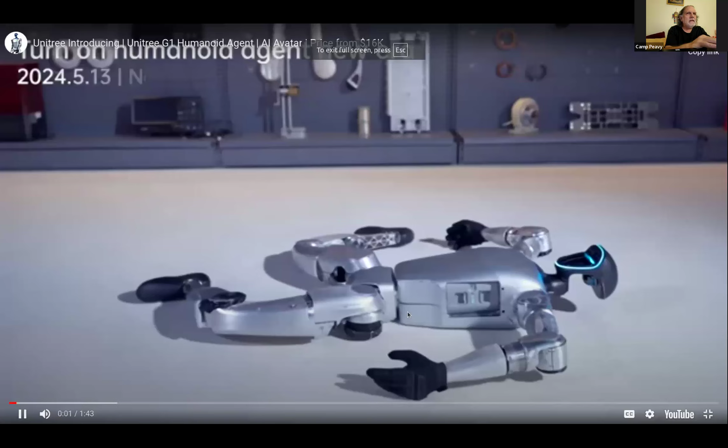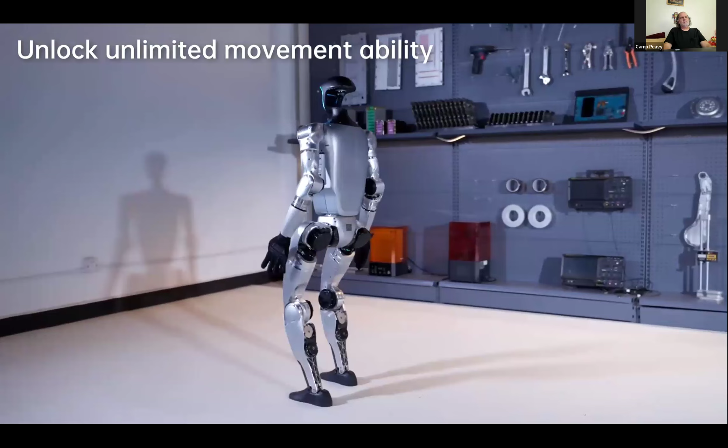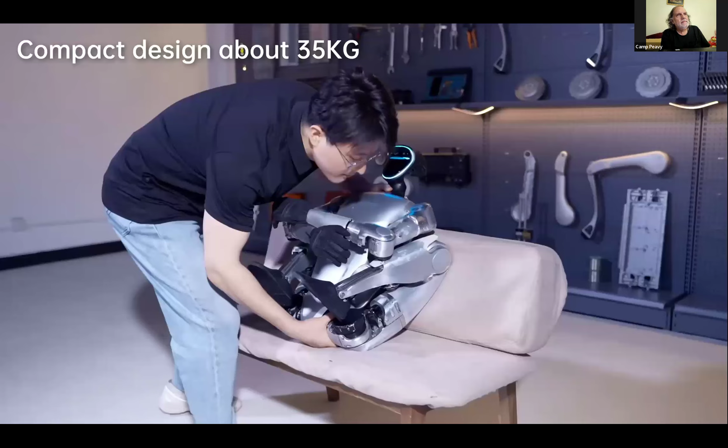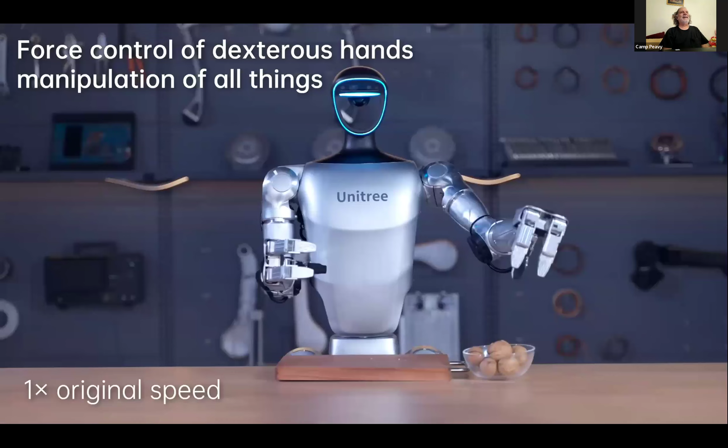Did any of you guys ever actually try to buy it? So the reason I ask is we actually tried to buy it, and it was kind of weird - we were asked, like, to verify who he was, almost like asking for his social insurance number just to even purchase it. And he was saying he couldn't use credit cards. It was really strange. I don't know if anyone else tried to actually buy it. I think Tony wanted to rent it. I think he was saying too, it wasn't like aluminum - it looks like aluminum, but it was kind of like plastic 3D printed parts. I'm not sure if that's true, but 16K for a humanoid robot, even if it was 10 times the price, like 160K, that's still an insane deal. Yeah, but you got to be able to get it, and it is pretty cool. They say it comes without hands for that price. No hands, and I don't think it includes software.

Anyways, there's a link in the chat there. Is there any more industry news anybody wants to bring up, talk about?

You want to see the Omni ChatGPT? I got a video I pulled up. Okay. Are you seeing my screen? Yes, here it goes.

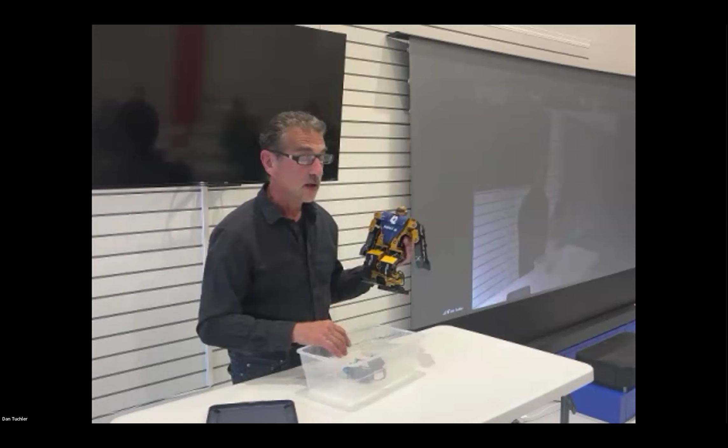That's not what we're demoing here, really. Originally this came with an IR controller, but in 2006 Dave Calkins asked me to do something a little less primitive, because the same IR controller controlled all the robots and we wanted to play soccer. So we took a PlayStation controller, cut the cord off, built a little PIC board with a Zigbee adapter on it. We put a Zigbee adapter in the head, and we ran it for years.

And then it got kind of cumbersome to run joysticks and buttons, so I created a Windows app, which was the easiest at the time with Microsoft Visual Studio. I was able to do push buttons and everything using the same Zigbee.

Ultimately, getting devices with Zigbee was a problem. We had to have USB connectors on them and everything. So for Robo Games this year, I threw away the Zigbee and bought these little things from China. They're little Bluetooth adapters to serial, very easy to interface, and I plugged them in.

I had to build a little voltage drop from 5 volts to 3.3, because it didn't come with a regulator, but you can buy them with a regulator. And I plugged it in, and then I wrote an app. It runs on Android, Windows, Linux, it runs on everything.

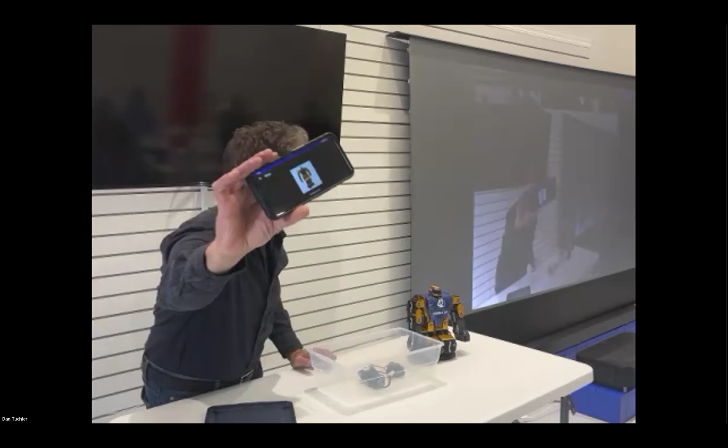I wrote it in Visual Studio .NET. So let's see, yeah, I don't know. Can you see that? Yes. Okay, so that's the app.

It might already be on, let's turn it on. Let's change the battery. Oh, there we go. Okay.

And then I may have to connect it, I may not. Bluetooth, and say connect, we'll find each one. I renamed each for the robot. This one's RoboNova 42, as indicated with the numbers. I couldn't figure a way of filtering out just by name, so I just choose it out of the list.

So we can go out, and then let's see, Kung Fu, and this shows you all the Kung Fu moves that are on there. Let's see if we can just do a left turn. And so that controls that.

Then ultimately, I had him doing the stair climb for the competition at Robo Games. I won the gold because this was the only guy that could walk up and down the steps. And I programmed it in about 3 hours, which was really amazing that I got it done.

But the important thing is the .NET app. If you want to do something really easy, the code, I'll send you the code. You can just use it as a template if you want to run something on your phone using Bluetooth and push buttons to control it. And that's my demo.

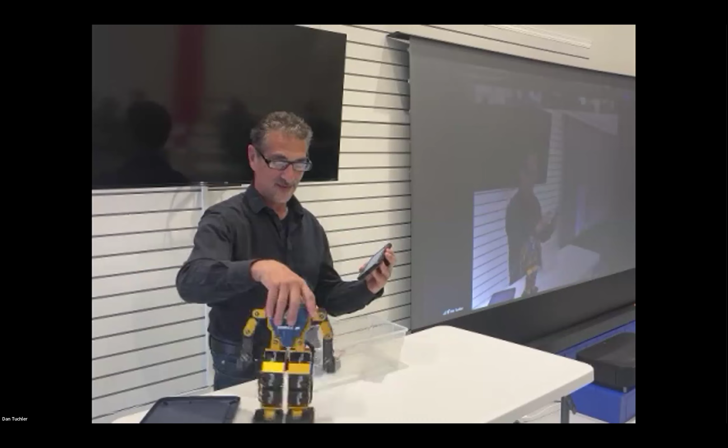So that's the kind of stuff. This is nothing new, yes, right.

Okay, thank you, it's awesome, Dan. Big round of applause. Are you not entertained?

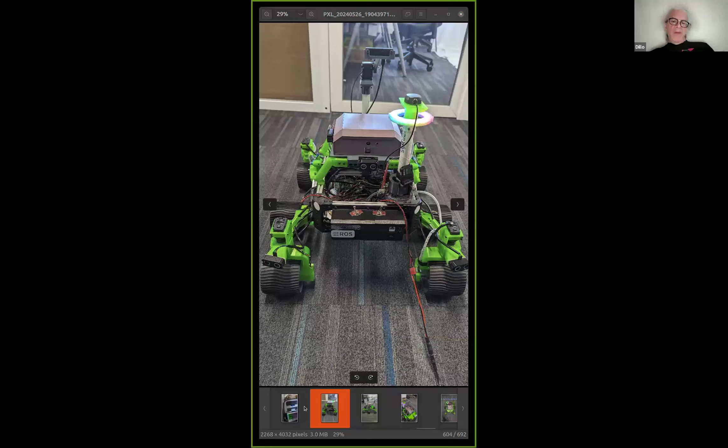Somebody from the club turned me on to these battery modules from a company called Parts Express. They're mostly an audiophile site, but they have these battery packs meant to power a portable speaker. It's 18650 batteries with a bunch of outputs and a barrel jack for charging, and you can plug in a solar panel. If anybody worked with the Turtlebot 2, it's got those same specific connectors on the back for charging your laptop and things.

So I've been building this in OpenSCAD, and I just finally got to the point where I was able to print out the full-size case.

What I wanted to show was this is what the robot looks like right now, with the RC car battery Velcro strapped to it. There's kind of wires hanging out, and I have to hook them and unhook them, and it's kind of a pain in the butt.

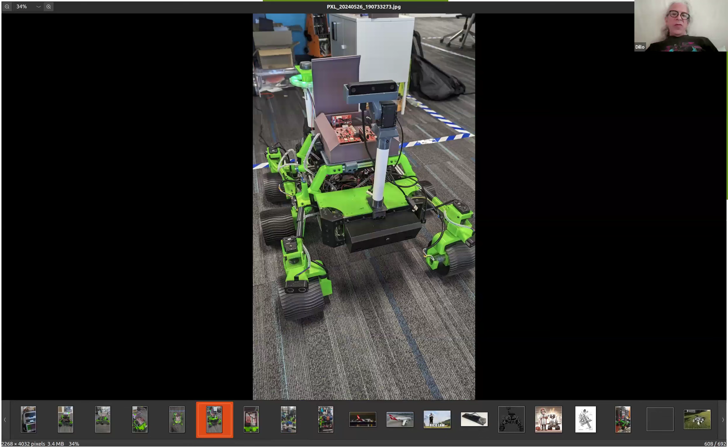So that's kind of what it looks like now. This right here is what it's going to look like in the not too distant future—all the cabling and wiring is gone.

I've got room for 2 battery modules in here. There's this thing in the back which provides a barrel jack to charge off of, and also 2 5-volt USB charging plugs. So you could plug in, like, a voltage boost for the OAK-D into that. That's kind of what it looks like overhead.

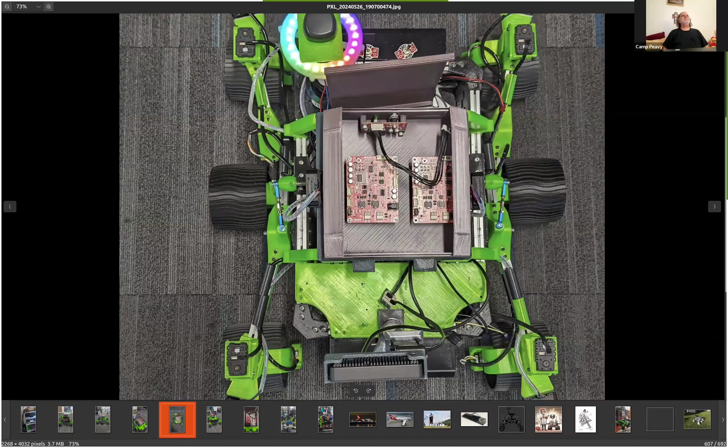And what are those 2 boards on top, Stephen? Those are the battery charging boards that I'm talking about. Okay, so this replaces the RC car batteries and all of the cabling, the Dean's plugs, the Dean's to Tamiya adapter, and just all of that mess with this barrel jack right here. And there are 3 18650 batteries in each one of these.

So I think it just cleans up the top part of the rover and even the insides a bit. You've got those 2 battery packs in there and you're plugging in a jack to charge those. Now all I have to do is plug in a wall wart to charge it. The wall wart is 12 volts. So this thing's doing the balancing and checking, yada yada.

It sounds a little alarm or buzzer when it's done. It does it all by itself, you don't have to hook in the balance cable. The balancer is all plugged in, you're just supplying the voltage.

It's a lot cleaner than this. Are those 2 packs the same? No, one is 12 volts and one is 7 - one is 11.1, that's different than the other one, and one's 7.4. What I get with this thing back here is it down converts to 5 volts. So I get 12 volts, and then 5, and the motors will actually work at 12. They work better at 6, but they will work at 12.

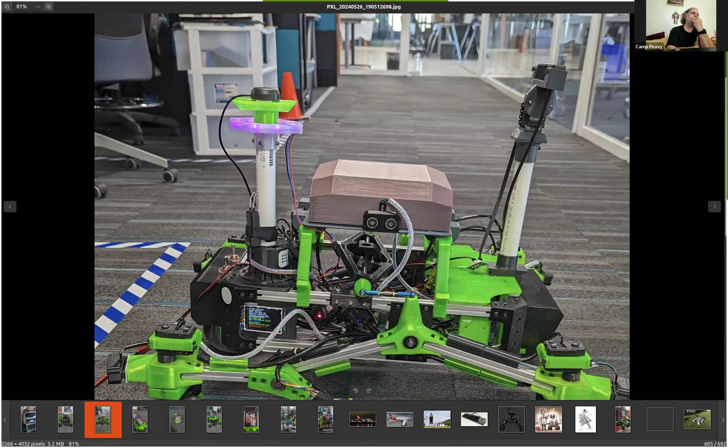So you charge those separately still, right? Well, you plug in the barrel jack connector into the back. Can you charge your RC car batteries with those too? No, the point is to get rid of the RC car batteries. Gotcha, okay I get you now - you're weeding out the RC car batteries. Yeah, and it just makes it a lot cleaner, and it looks... I don't know, I think this looks nicer.

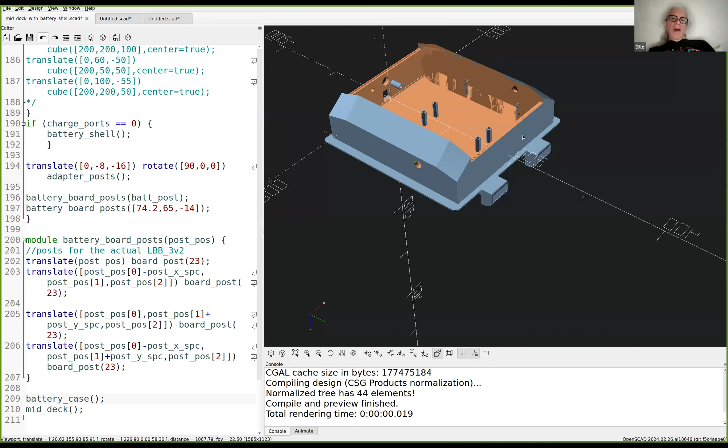So this is what the 3D print looks like. You've got that deck there that you saw, and then you've got the case.

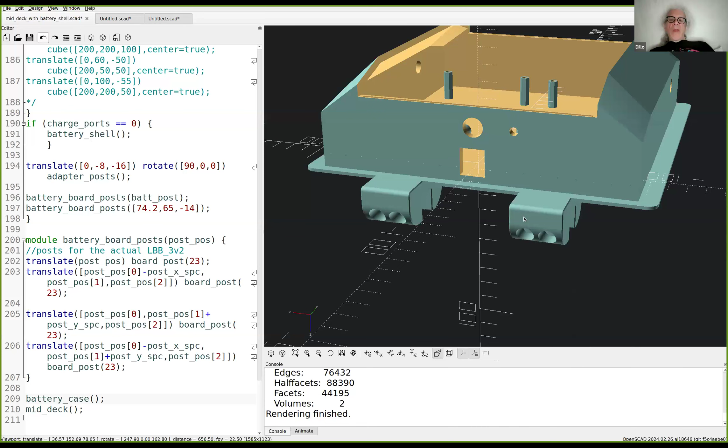You're doing that with FreeCAD? No, OpenSCAD. Okay, very good. So you can see where the posts are, where the batteries go, and then you've got this thing on the back with the barrel jack and the USB. And you 3D printed it? Yeah, I've 3D printed at least one revision.

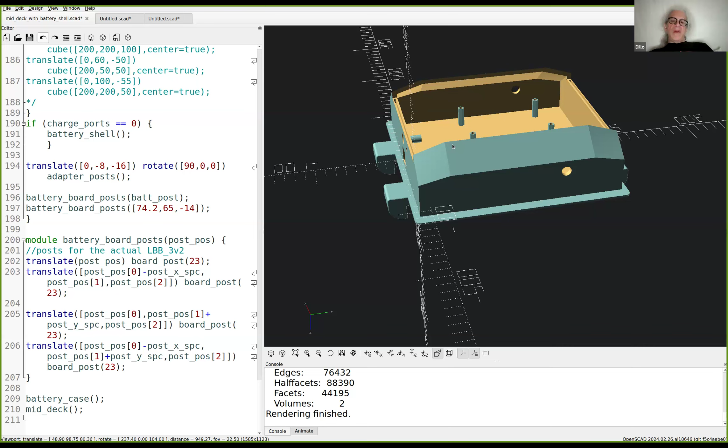Super, all right, so that's basically it, that's kind of what I've been working on. It's nothing, you know, kind of like a lot of my stuff - it's nothing super sexy, not a fancy algorithm or anything, but it's sexy enough, it's practical. Sexy in a practical way.

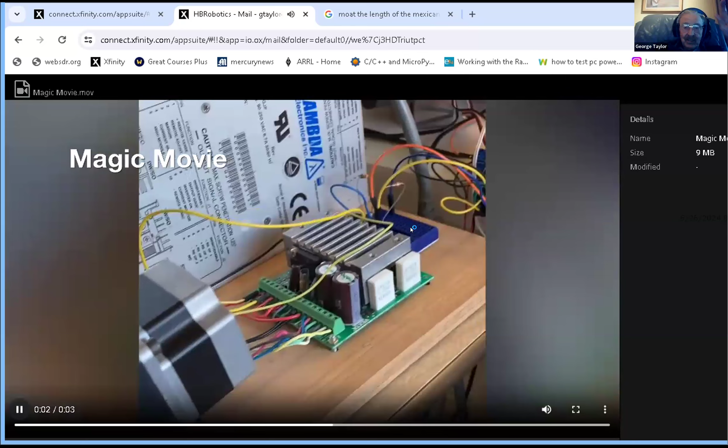I don't know if you see enough of it - we're seeing this is the setup. I got this at the flea market, it's a pretty nice setup. And then there's a Raspberry Pi, I had to do a level conversion here to protect the Raspberry Pi. But anyway, I've got it working, and believe me, dealing with that VIM stuff is a lot more complicated than they would lead you to believe.

Are we talking about voice control? Is that what you mean when you say VIM? No, remember the VIM presentation that we had in October? I clearly don't, what is VIM? Refresh my memory. It's VIM - VIAM.

VIAM. The guy in New York. They've just joined the Open Source Robotics Foundation too. So you're talking about VIM, VIAM. I got you, okay, VIAM. Cool, you're right.

I've been playing with that thing, and I'll really tell you, it's a lot more complicated than they led you to believe on that presentation. They suckered you in, huh? Okay, very good. Nothing's easy, especially in robotics. It wouldn't be fun if it was.

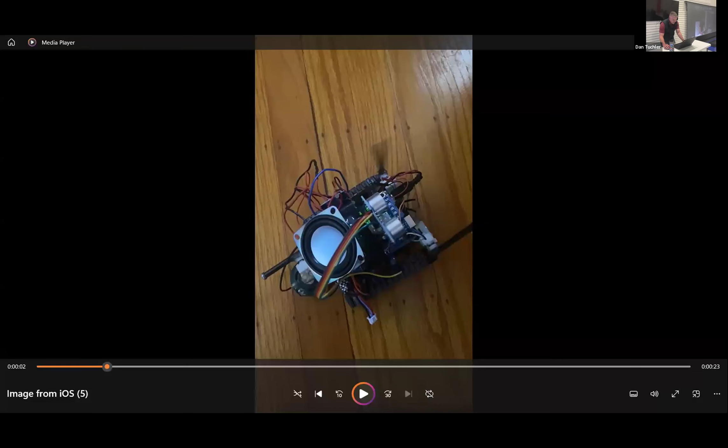So before we get started, I want to do my show. There's one thing about Chuck Pitzer, folks, is you don't have to be good looking, but it doesn't hurt. Shut up, Cam. You're too kind, keep it coming. Stop, dude.

So up like a tabletop, can anybody do this? Because the cool part about this robot is the sound. Nobody can. Is that like the yellow drum machine? It is, exactly, that's where I got the inspiration. But instead of using a PIC, I use an Arduino with a motor shield. Yeah, I tried building one of those like 10 years ago, actually longer, maybe 15 years ago, and I didn't get very far, but I should probably do it again. I would be better at it now.

Reshare the video and optimize for sound. If I could get this set up with sound, maybe I'll bring it in next time, try it again. Whatever the case, it's the most fascinating thing because the way you can set up the songs in there is it's all bitwise, right? So you're mapping out your hi-hat, your bass, and your drum, and then you layer in. You'd layer in a sample, so it would do an initial beat, sample that, use that as a layer, and then run that on repeat, and then layer in over it.

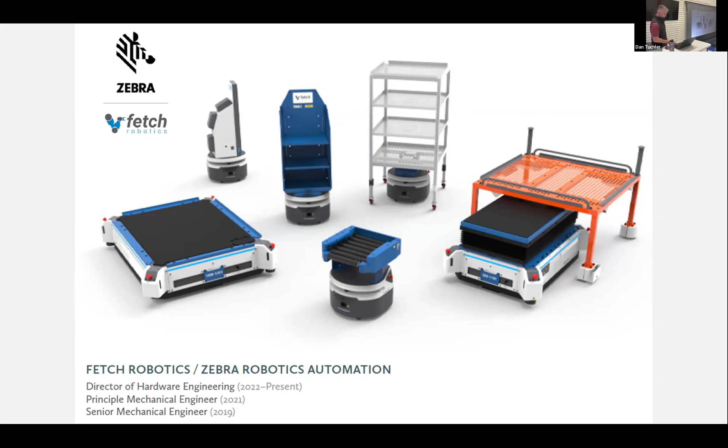Okay, this is where we were. Neato, myself, Abby, Raph—we were at Neato. I think Raph, you might have been there before me. I started in 2013, it's still very early days.

When I was looking around for robotics companies, there wasn't a lot back then, at least commercial ones you could do full time. There might have been industrial robots, usually referred to as industrial arms, and other types of manufacturing automation. But there weren't a lot of mobile robots back then.

So I was pretty lucky to kind of fall into this one. I worked pretty hard for it too, I had to move up from Los Angeles to the Bay Area to take this job. Like I said, it was a lot of fun—early days of robotics, coming to the robot meetings, robot clubs, and working in that environment where we got to explore different ideas.

The thing with residential robots is you didn't have to worry as much—at least I didn't. It's surprising to me once I got into the industrial automation space how important risk assessment was. In the residential commercial space, we didn't do risk assessment or functional safety stuff, we just kind of winged it. We knew we needed certain things like drop sensors, but we didn't put together a formal risk assessment with performance levels, have third parties look at it, or get any kind of CE marks.

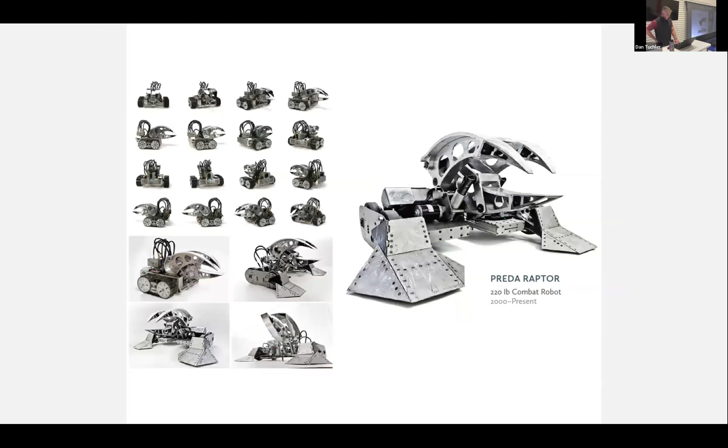You can actually see elements of Preda Raptor and Ghost Raptor because I used the same chassis. Those chassis pieces were ones I originally built back in 2000, and then I just hacked them into Ghost Raptor, and I kept using them because I'm lazy. It's hard to build robots, and expensive.

So the money thing, we talked about that a little bit. I was struggling in LA, living in LA, trying to find a way to get into business, and I had a couple opportunities.

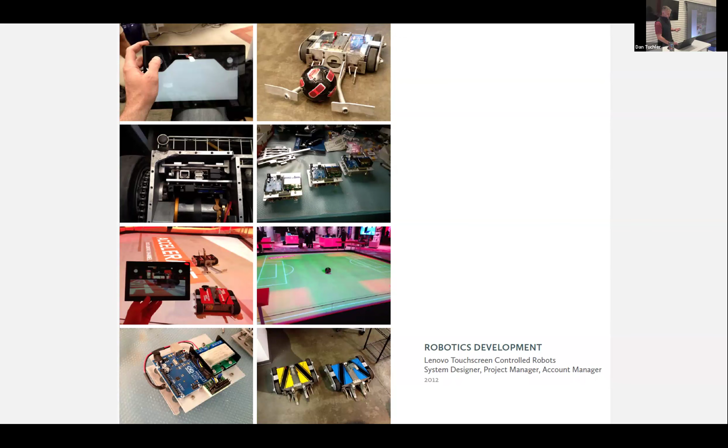This one was from Lenovo. I built some robots, or at least some setups for them where they could do manual driving through a touchscreen. That was a good way to make money, but it wasn't a living.

Also dabbled in exoskeletons, and this one you might remember from Comedy Central once. This was Gamma Raptor, and this is 24 years ago or something.

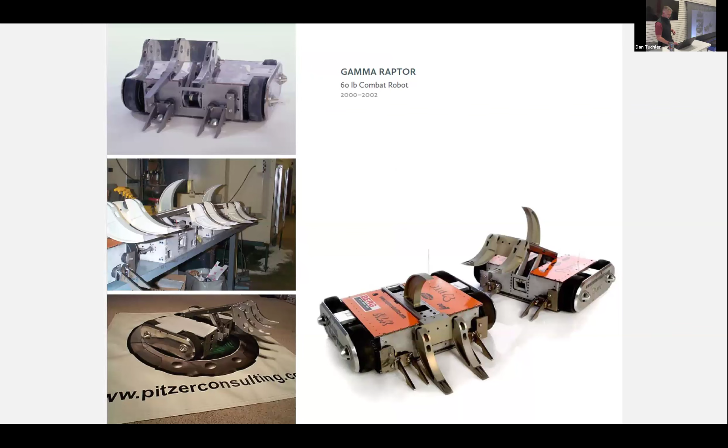Okay, let's get to what we're here to talk about today. Oh, by the way, you might recognize one of the members in the audience here. This is Sarat.

So Sarat is over there doing the disparity map calibration for the stereoscopic stand camera on top of the robot. This is one of the NASA sample return robots. If anybody's familiar with that, they have the Centennial Challenges, like the Regolith Challenge, which is a sample return challenge. They also have the subterranean challenge.

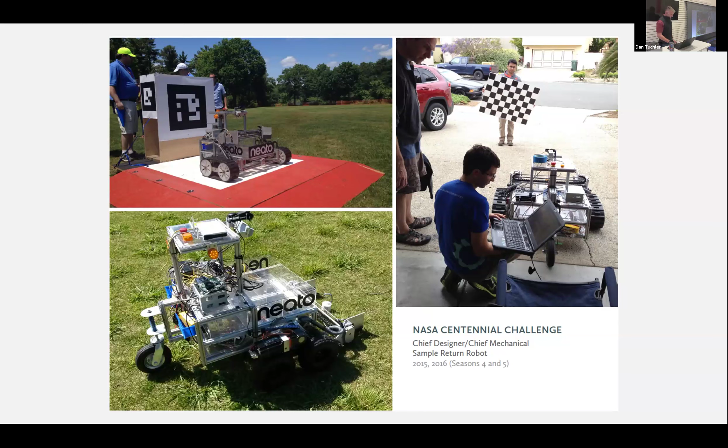Anyways, we had a lot of long nights working on this thing. Worked pretty well, we had a lot of fun. Nod your head down, Sarat. Okay, yeah, that was a fun one.

Okay, let's get down to brass tacks. So industrial grade, what does that mean really? You can call it whatever you want, it could be a poor design or a great design. But whatever the case, if you're going to sell it out into the world and let it go out into the wild, you've got to conform to a couple different kinds of standards, directives.

If you're selling in Europe, there's a different level of liability as opposed to selling in the States. Whatever the case, usually you want to use some of these as maybe a first stop, especially if you're working with warehouse automation type of robotics. Most of this is going to apply to anything you put into warehouse automation in the States — switching power supplies, the United States standard for that.

You also need low voltage directives for anything under 60 volts — you're going to have a certain set of standards. Anything above that is considered more dangerous, with different standards.

So for us, simply the thing we got to worry about the most — my job, as director of hardware engineering, I'm kind of the gate for not all the design work, but I'm the gate for the thing that's going to keep us safe. I have to make sure we don't put out anything in the world that's going to electrocute somebody — it's ground bonded, high pot tested, and then functional safety, this kind of thing.

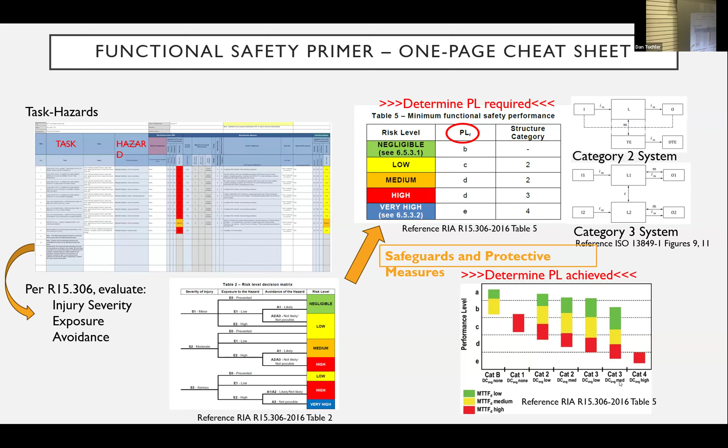Fun, it can be. It's interesting to dig into the system-level performance. It can be rewarding.

If anybody is actually interested in functional safety, I can tell you in the Valley you'd be in high demand because there's not a lot of functional safety experts there. Usually they're in Ohio, or Washington, or somewhere else, but not in the Valley. It's hard to get good coverage. Believe me, if I had my choice, I'd hire somebody to do this functional safety work, but I get stuck with it a lot.

Chuck, you're director of hardware, right? That's correct. Is hardware electronics or mechanical? That's everything - it covers mechanical, product design, electrical, a little bit of firmware. So I get to dig into a lot of really cool things.

It's like the CAN bus that's talking to the drives, talking to the charge base, talking to the batteries, all these things. There's the nav part too, where you're putting together drivers for base controllers and things like that. Then there's things I don't usually touch, but I see all the firmware that happens on our main boards, triggering breakers and things like this.